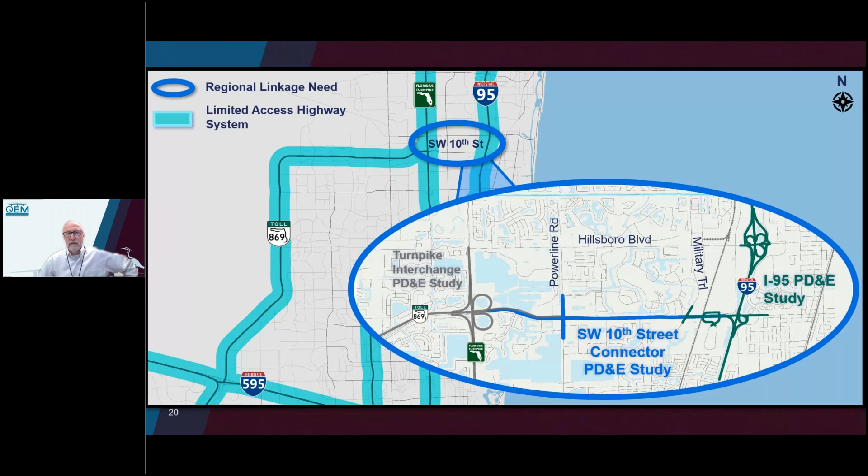So Southwest 10th Street, this is basically a missing link. You see the cyan color there, that's limited access highways with State Road 869 to the left, which is the Sawgrass Expressway, ties into the turnpike. When it was originally planned, it was meant to go all the way to 95. It got shut down by community opposition. And you're going to see in the next slide a number of attempts to try and get that connection made.

Currently it's a local arterial road. And as you can see, there's a strong, heavy movement that wants to go from the east to the west, and a return movement from the west to the east, 51,000 trips a day in that particular direction. So all that traffic is forced into a local road that now has to share the road. And so there's several incidents that have occurred, accidents along that arterial that has a number of signals along the way. It's about a 2-mile stretch between those. Next slide.

So as I mentioned, they had planning of the Sawgrass Expressway back in the 70s. They actually opened in 88. Since then, the DOT tried a couple of studies, one in 93, to put in that missing link, and the MPO voted against it. And then again in 2008, where feasibility was completed, but the MPO would not prioritize the project. So as traffic got worse and worse, the MPO took the initiative with the department to develop a community oversight advisory team. In 2015, they came up with several recommendations that were made in order for the DOT to move forward with a new study in 2017. So if you go to the next slide.

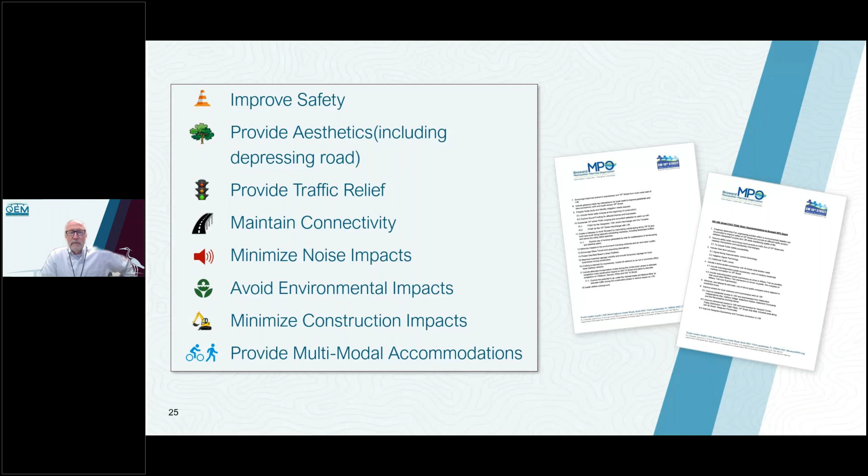Before I jump into that, one of the big points of opposition that came out of the coat was a watercoloring of a depressed roadway. The idea was, okay, we'll let you put in a limited access roadway here, but you've got to put it underground, cover it, or depress it. That was a lot of the expectation of the MPO and the coat as the PD&E moved forward. So as the PD&E got started, we held an alternatives public workshop.

As the team developed the different alternatives, they looked at the depressed section and the amount of impacts that depressing a section would create. It actually introduced a lot of right-of-way impacts. We had to deal with drainage, so we would need some type of pumping system and so forth. We presented a lot of the impacts as well as different alignments: a center, a northern, and a southern alignment.

Through that workshop, there was emphasis to reduce the number of impacts, which actually helped us create more of a range of depressed elements as options, so we wouldn't have to depress as much roadway. We settled in on the northern alignment.

So we did a lot of public outreach and went to alternatives public meeting number 2, and we still got a lot of pushback. So if you hit the animation...

So what we did after the workshop is we sharpened up the pencils and so forth, and we figured out a way to move the profile to the west and still make the connections we needed to the west. So we were able to eliminate that.

With these decisions we made after the workshop and with what we had handled at the waterways, we felt pretty confident we had addressed the concerns and were ready to move forward.

So in October of 2019, the city and the MPO started raising concerns, so we decided to postpone the public hearing. So we had to regroup.

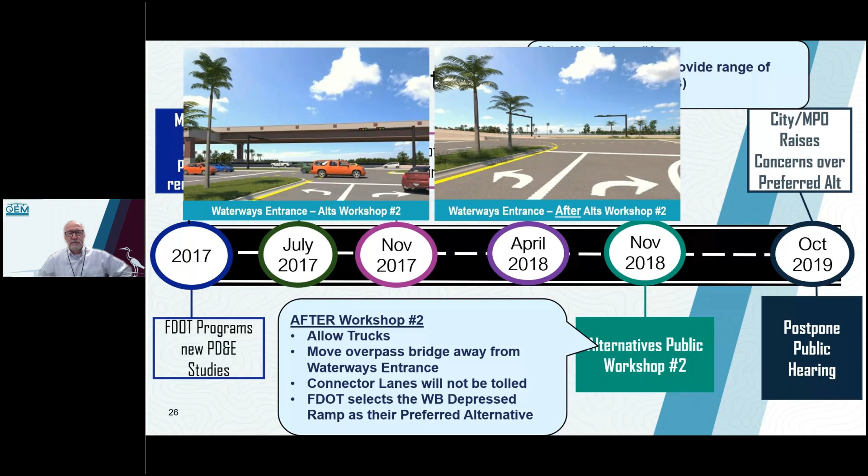What do we do? We decided we really needed to understand the concerns. We thought we knew the concerns, we thought we had made some very good decisions to address them, but it wasn't enough. So we had multiple meetings with the city of Deerfield Beach, who was the primary vocal entity that was really fighting for what they believed in for the project.

And we sat down with them a number of times to make sure we understood the challenges. As we went through this, we got into more detail where now they were concerned, and they had brought this up before, but we didn't gauge the magnitude of it, that they wanted the express lanes or the new connector lane on 10th Street to connect to the general purpose lanes and not just the express lanes. A lot of that has to deal with trucks would have to shift over and use the local lanes, and they just wanted to get more traffic off the local roads.

They also went back to what was really one of the comments about multimodal. So they wanted more of a complete street element in the project, and they were concerned that there wasn't enough depressed sections in the project, and they wanted more green space as well. They felt that if we depress sections, we'd get automatic green space, but as we worked through the impacts and who would maintain things and what exactly you would put on a depressed section, it wasn't going to be a lot of green space or park area like you've seen in some of these other areas.

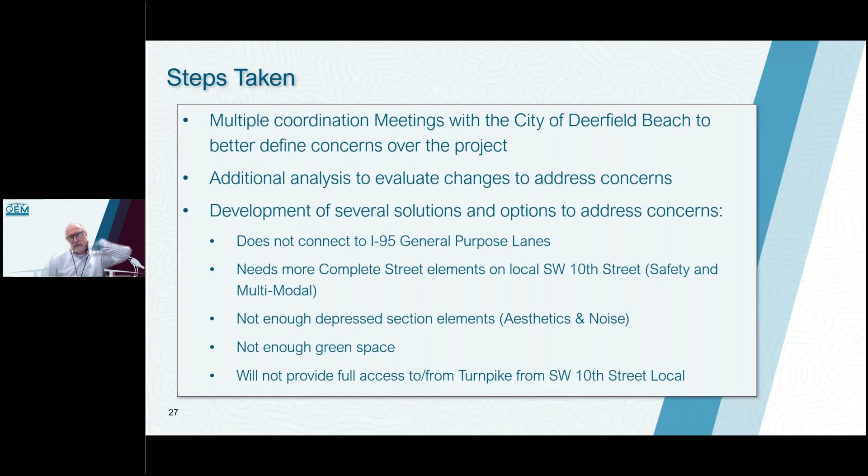So for the connection to 95, the district had made the decision that we will make that connection. We did a layout. We showed we could fit everything within the right of way of the interchange and still make that connection. We did cost estimates, and the department made the decision to move forward with those additional connections.

We showed how it would work traffic-wise, the benefits we received, and they made that decision. The complete street elements, we were able to incorporate a shared use path throughout the limits of both projects. So that was a huge benefit to be able to fit a 12-foot path throughout the limits.

As far as the not enough depressed section for the roadway, if you click on that, we can't necessarily say we checked the box, but we did explain all the challenges and the impacts, because that actually introduced more right-of-way impacts, construction challenges, utility relocations, business relocations as part of that. So we really went into depth about why those impacts really meant you weren't getting the benefits they thought from a depressed element.

And then from a not enough green space perspective, we actually created another option, which actually reduced all depressed elements on the project. But by doing so, it gave us more space that we could give back to the community, some nice buffer area and green space, and really allow for somewhat of a meandering shared use path through that area.

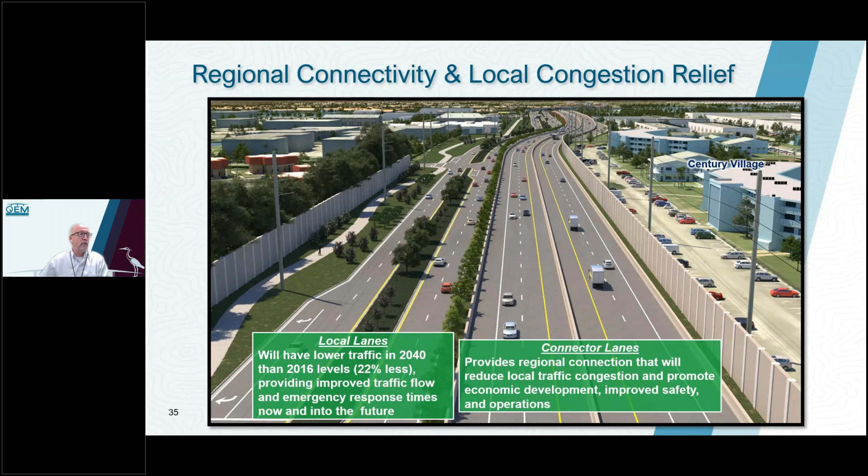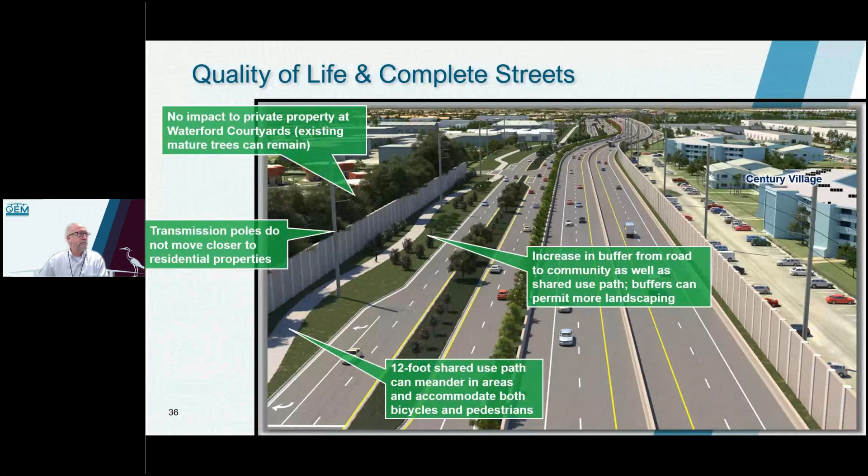So in closing thoughts, again, set goals. What do you want to get accomplished with your virtual meetings? And plan. Challenge each other on doing things better and making sure everybody understands their roles and responsibilities, and have redundancies. You know, if somebody's sick, somebody's computer's not working, how are you going to deal with that? Develop a way to communicate behind the scenes so that you can handle those things that'll happen, because nothing goes smooth.

Even though you want to have an interactive meeting, you do need to have control over the audience. So you want to make sure that they understand that and where they'll have opportunities to talk, so that they don't get impatient. And when they do ask a question or a chat, respond to them right away. Tell them you got it. Stand by, we'll be answering it shortly. If not, please let us know. Understand how to use all those different features on it, and think ahead.

Maximize the time that you have, and also be prepared if you have extra time at the end. If you've set an end time, how you want to deal with it if they're not participating, how you want to fill in that time, or at least provide some beneficial information.

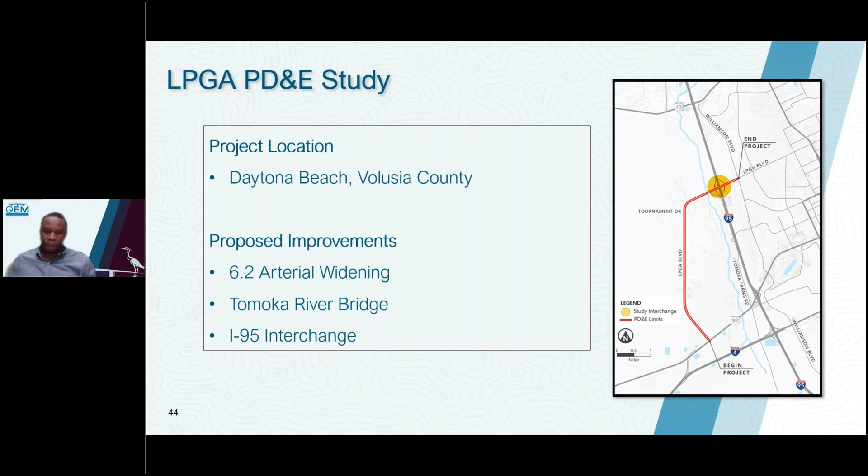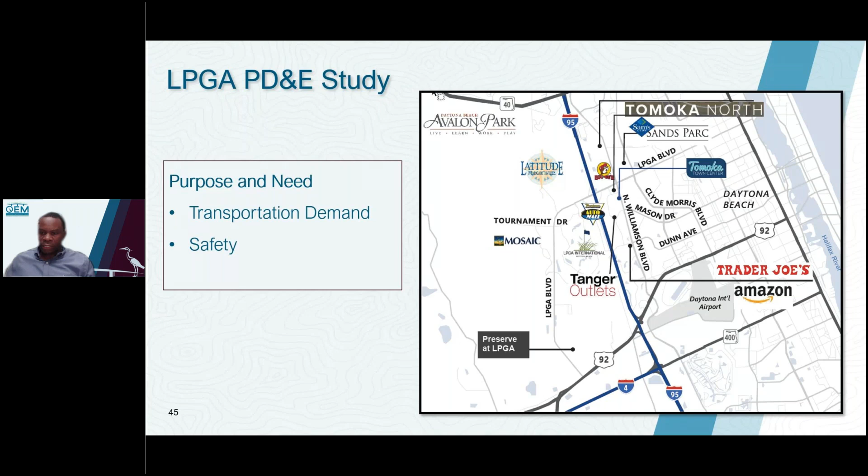The area has experienced unprecedented growth in recent years, transforming from a rural area in the 1980s into a hub of multiple major developments, as highlighted on this slide. Many more are being planned and are coming. Transportation demand has increased and congestion has grown significantly over the years and is expected to get worse in the future. Additionally, the corridor has severe safety issues which arise from congestion. Given these needs, the project is well needed by the residents and businesses alike in the project area.

So the community came together to solve the problem. In response to the community call, a coalition was formed between the Florida Department of Transportation, River to Sea Transportation Planning Organization, City of Daytona Beach, and Volusia County. All parties contributed financially to advance this project.

One unique aspect of this project is it was born in the community. FDOT programmed the PD&E study and design phases, and is diligently working on identifying construction funds. Our strong relationship and active engagement with local leadership has enabled us to develop mutually agreed upon solutions that everyone can support. Local leaders are also assisting us in effectively communicating the right messages to their constituents.

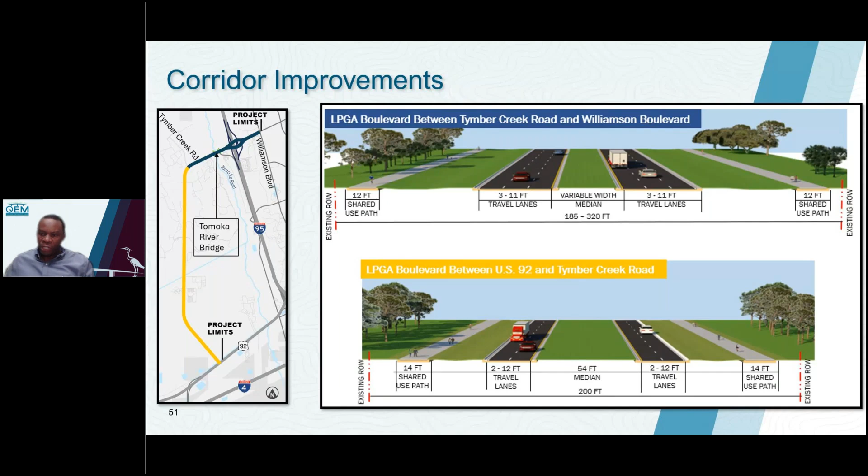Near Tomoka River Bridge, the right-of-way is narrower. However, all bridge improvements are optimized to be within the existing right-of-way.

Here's a picture view of the existing Tomoka River Bridge, which will be replaced with a new 340-foot bridge. The new bridge will match the 6-lane section that I described previously, and also to enhance wildlife connectivity, 2 wildlife shelves are proposed beneath the bridge.

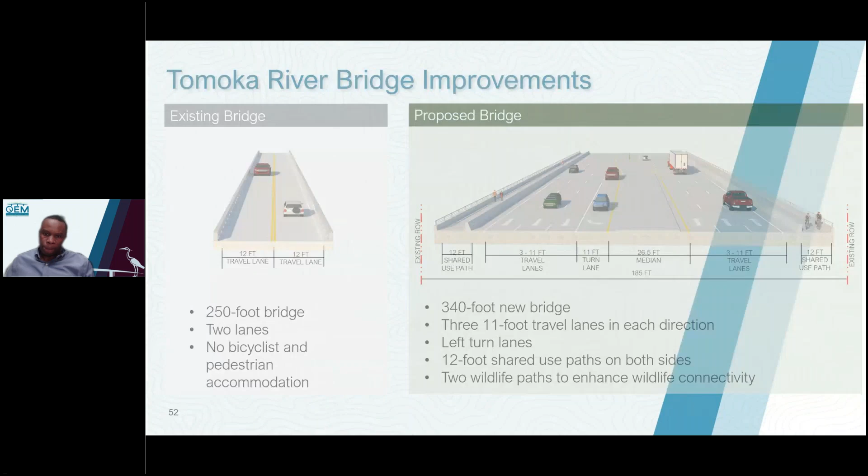In terms of intersection improvement, we use the intersection control evaluation (ICE) process to evaluate several intersection concepts that would improve safety and reduce congestion. In addition to traditional signalized intersections, we analyzed modern roundabouts, restricted crossing U-turns (R-CUT), through cuts, and median U-turns, which are more effective and safe.

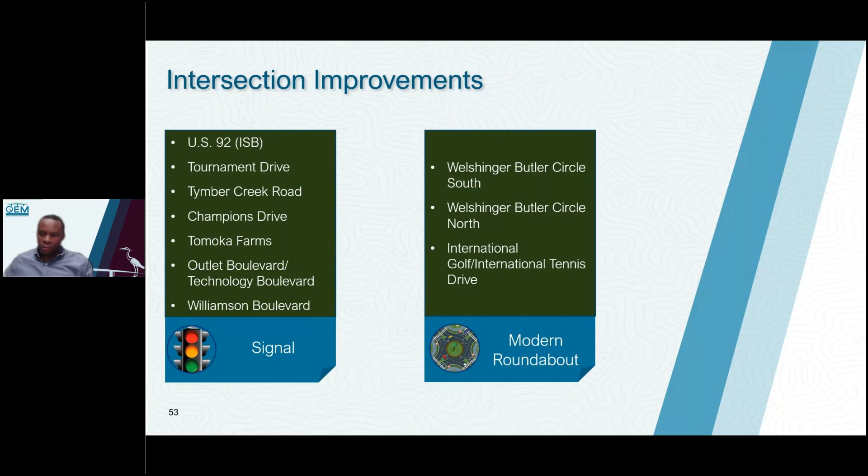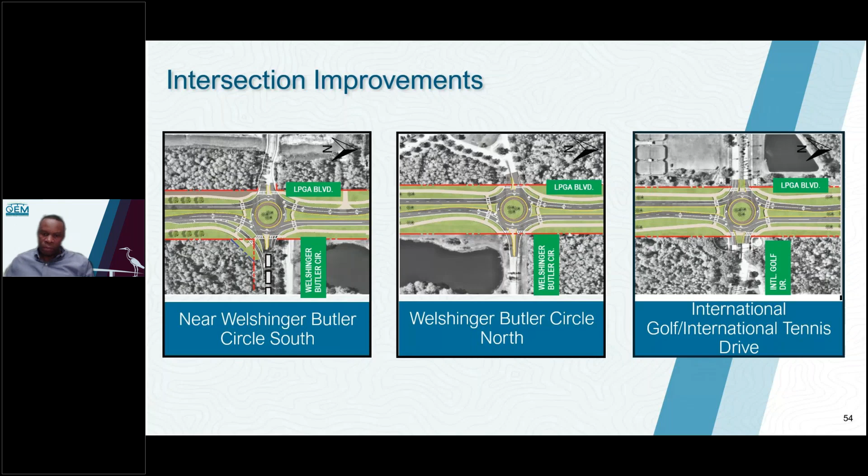This slide shows the modern roundabout, which we warranted over a traditional signal at the following intersections: Welshinger Butler Circle South and North, and International Golf Parkway at International Tennis Drive. Unlike traffic circles, modern roundabouts are specifically designed to prioritize safety and traffic flow efficiency. They operate on a yield system, which eliminates the need for a full stop and ensures a smoother, more efficient flow of traffic.

Given that roundabouts are new in the area and in Volusia County in general, our post-public open house engagement effort focused on educating residents about the difference between modern roundabouts and traditional traffic circles. Some residents in this area are retirees from the Northeast, where roundabouts are being replaced with traffic signals, and this was one of the concerns they brought to us. We clarified that those are actual traffic circles, and we highlighted the safety and operational benefits of the modern roundabouts we are proposing in comparison.

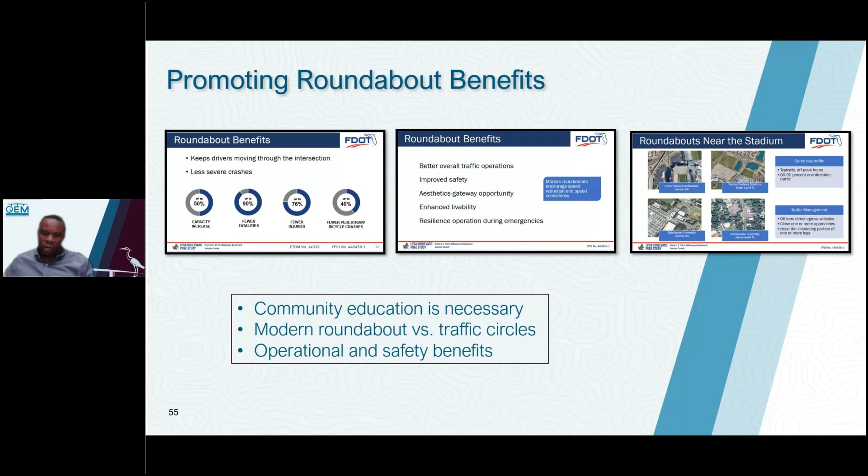Traditional signal control is proposed at Tomoka Farms Road, Outlet Boulevard and Technology Boulevard, and the Williamson Boulevard intersection. During the public open house, we introduced innovative concepts designed to redirect certain movements at the intersection.

A restricted crossing U-turn was initially proposed at the Tomoka Farms Road intersection, and a through cut, which prohibits through movement at the intersection, was proposed at the Technology Boulevard and Outlet Boulevard intersection. After more in-depth evaluation and careful consideration of community feedback, District 5 decided to retain this intersection as a traditional signal, accommodating all movements.

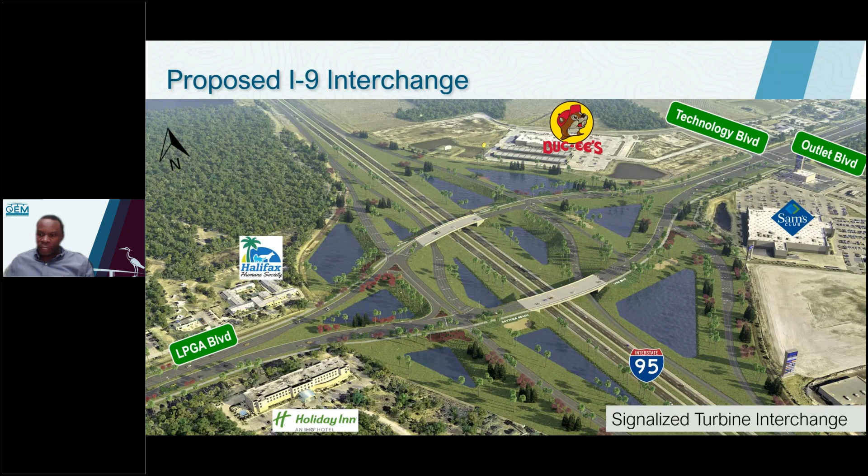In terms of the interchange, the proposed I-95 interchange is an innovative concept called a signalized turbine interchange. It borrows characteristics from a freeway-to-freeway interchange and a split diamond interchange. The on-ramp and left turn lanes are separated to improve capacity of the ramp terminal intersection. Also, the off-ramp left turns are tucked under the side of the bridges, and they intersect LPGA with two-phase signals.

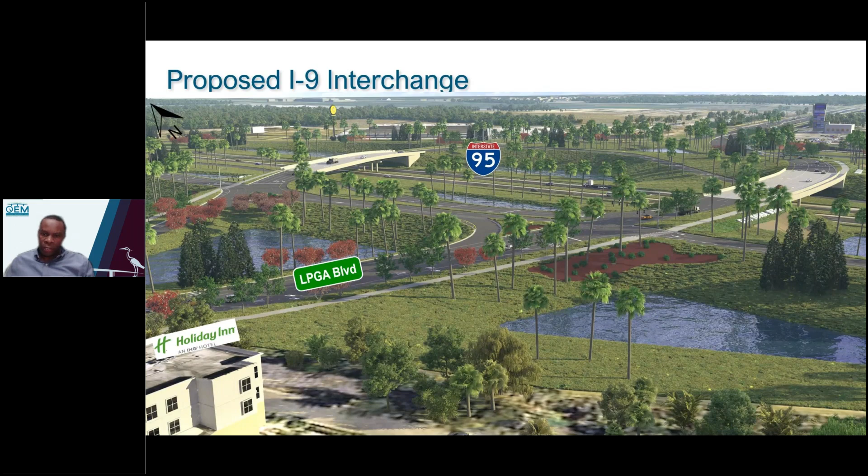This slide shows a close-up view of the interchange rendered image, with the camera located above the Holiday Inn, at your left bottom corner of the slide. The bridges are separated to provide longer queue storage for turning vehicles without interfering with oncoming traffic. At the interchange, LPGA will operate as one-way pairs. This is how we will realize increased capacity. Another benefit of this interchange is the reduction of the number of conflict points where the ramps intersect LPGA Boulevard, to enhance safety.

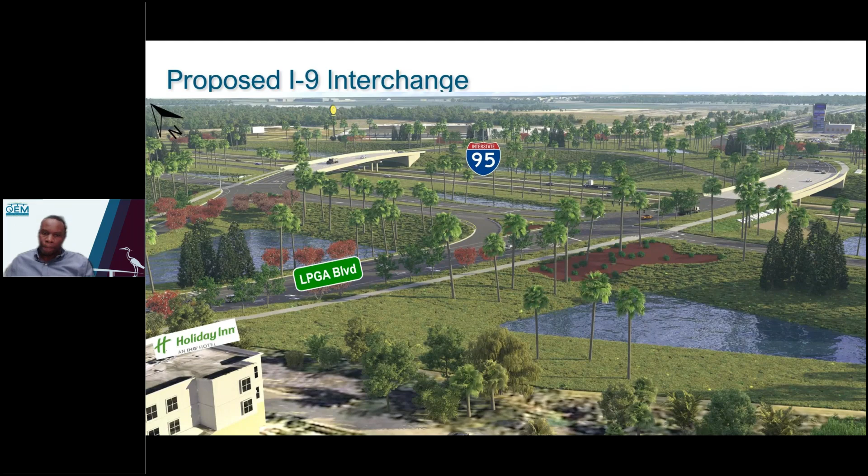Another view showing the southbound on-ramp of the interchange.

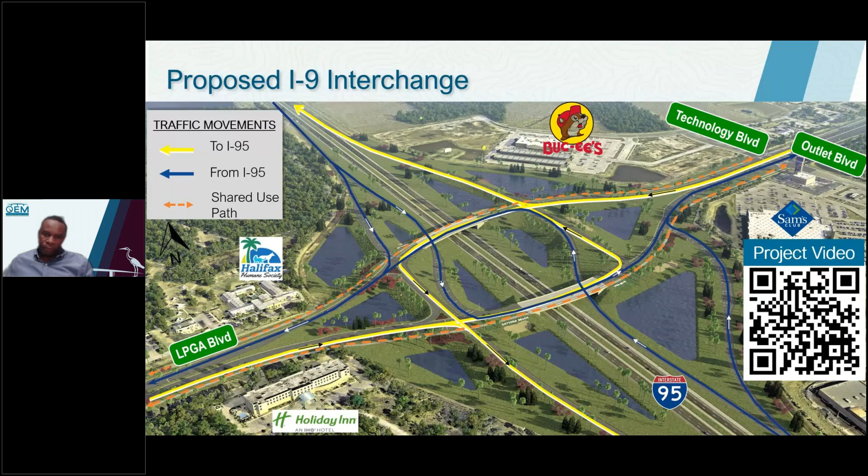To close, this PD&E study received location and design concept acceptance in February this year. You can follow the link shown there if you have any questions. I'd like to take this time to thank District 5 for entrusting HDR with this PD&E study, and our sub-consultants who helped us deliver this project, more specifically Giabi Consulting and Management for leading engagement efforts. Thank you for your time.

It takes a team, doesn't it, Victor? Thank you so much. We do have a question for you from Kimberly, so we got your question and we'll forward it on to Victor. So we're going to keep moving.

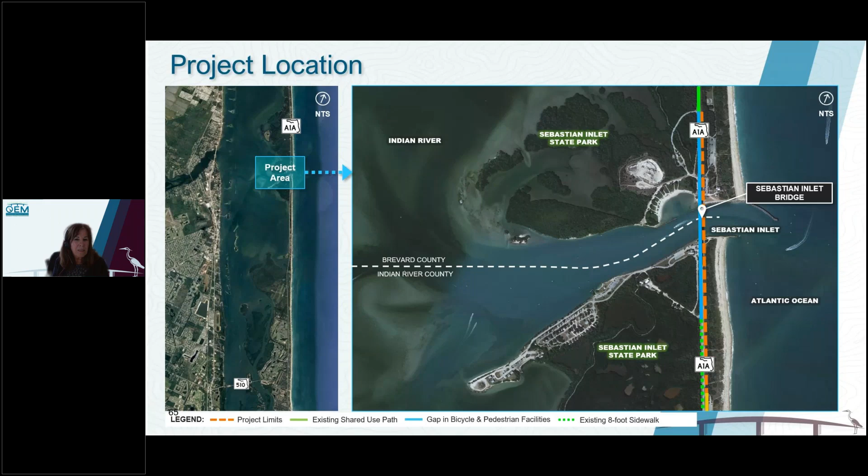The Sebastian Inlet Bridge was constructed in 1964 and has been retrofitted a couple of times. The existing bridge vertical clearance is 39 feet, and the horizontal clearance between the bridge fenders is 150 feet. The bridge typical section is 2 lanes, one in each direction, with 2-foot shoulders and no bicycle or pedestrian facilities. The bridge is also eligible for the National Register of Historic Places under Criterion C for engineering, and it's part of the Indian River Lagoon National Scenic Byway for State Road A1A. I also want to note in this image, you can see under the bridge there are fishing or observation piers, one located on each side, extending from the park area to the bridge fenders. Next slide.

The purpose of this project was to address the bridge's structural and functional deficiencies and address the gap in system linkage for bicyclists and pedestrians. The need was that the bridge, under the National Bridge Inventory rating system, was rated structurally deficient and had a low health index and sufficiency rating. That doesn't mean the bridge is unsafe to travel across, it just indicates the need for replacement. It supports the Indian River County Bicycle and Pedestrian Plan for State Road A1A at this location to address the gap in bike-ped facilities. During the project we did a bicycle and pedestrian count along with traffic, to assess how many people use the bridge. Over a 4-day period, we had 231 bicyclists cross the bridge—they crossed in the travel lane—and 5 pedestrians. Next slide.

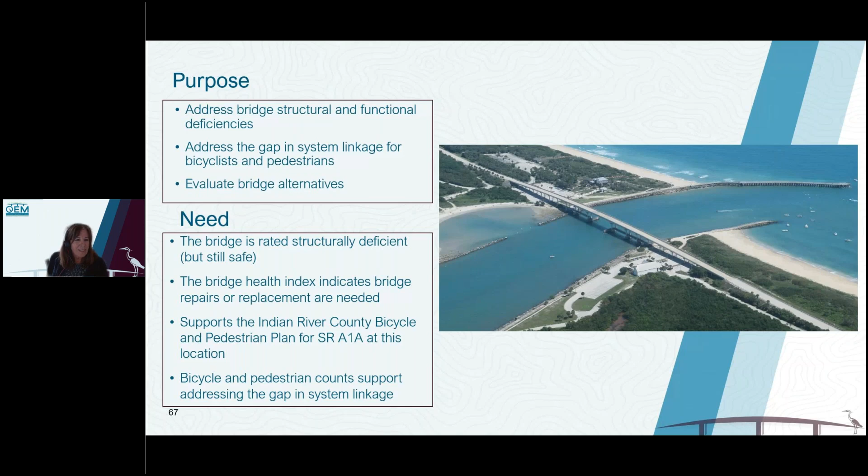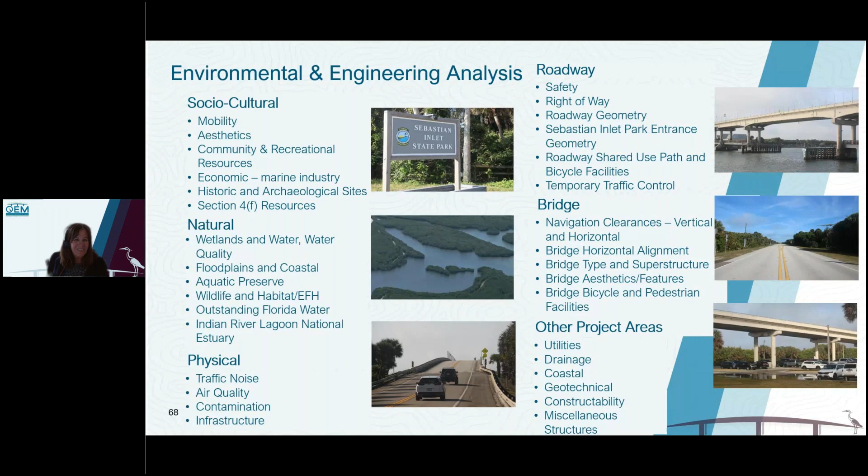Unique to this project is that the land under the Sebastian Inlet is actually owned by the Sebastian Inlet District, and they were founded in 1919. They're a taxing district that was put in place to maintain the Sebastian Inlet and keep it open, along with some other features and amenities that it does have.

I also just want to note that the Sebastian Inlet is not part of the Intracoastal Waterway. The Intracoastal Waterway is to the west in the Indian River Lagoon, about 2 miles to the west. But the Sebastian Inlet District, in the recent past, has dredged a channel through a U.S. Army Corps of Engineers permit to the Intracoastal Waterway in order to help maintain that navigation connection between the Atlantic Ocean and the Indian River Lagoon and the Intracoastal Waterway.

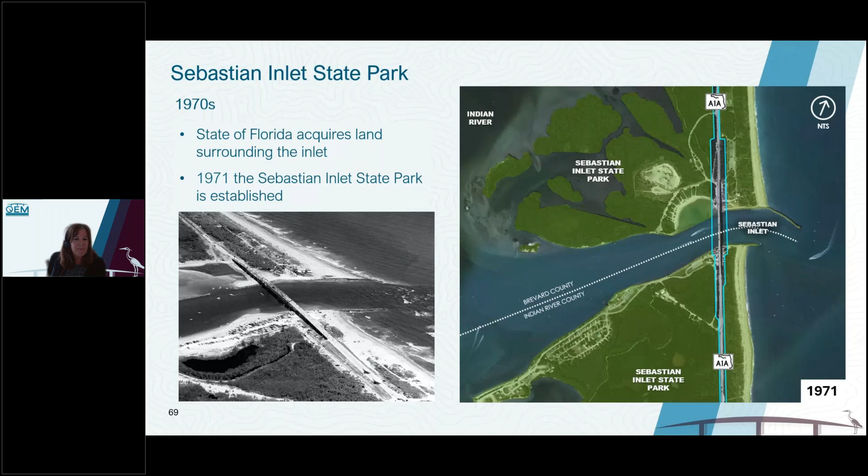So as you can imagine, just based on where this project is located, there was a lot of agency coordination at the federal level, at the state level, and the local level as well. The U.S. Coast Guard, because a bridge permit is involved, is a cooperating agency for this project.

So very early in the PD&E study, we kicked off coordination with the Coast Guard because we had to be able to determine what that preliminary determination of vertical clearance would be, if we would be maintaining the existing 39 feet or if there was a need to increase the vertical clearance. And as I had mentioned, the Sebastian Inlet is not on the Intracoastal Waterway, which the guide clearance for bridge crossings, the Intracoastal, is 65 feet vertical clearance. So this was a little unique because it's a fixed bridge.

There's no bridge tenders, so we didn't have any tender logs that let us know what kind of vessels were passing through the inlet, what the sizes were. So we, in coordination with the Coast Guard and their scope of work that they gave us, developed a strategy to do a navigation survey. And that was an online survey, and I'll get to that in a few minutes. But we used that information that was gathered along with the unique characteristics of the Sebastian Inlet. It has unique bathymetry, it has a skew angle, it is pretty aggressive in its current that passes through the channel. So there were a lot of factors to consider for this vertical clearance in this navigation needs memo.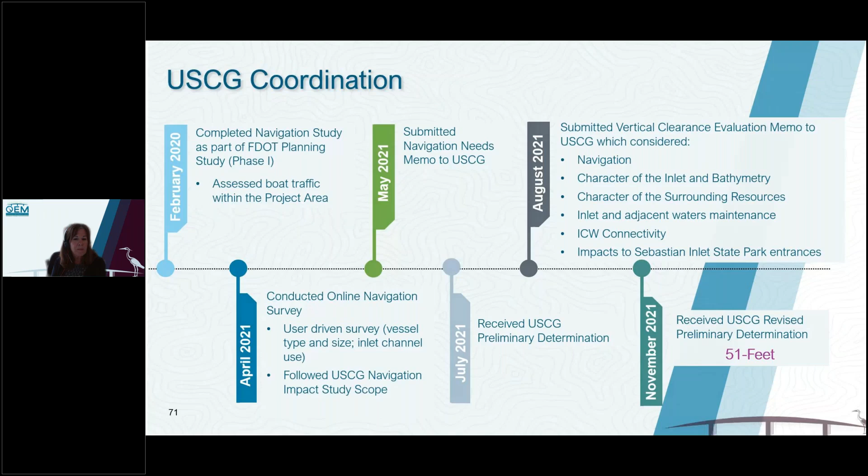So at the time we began this online navigation survey, I just want to note that there was also a new chapter that was added to the PD&E manual for U.S. Coast Guard coordination. So this was one of the efforts that came out of not only that new chapter, but this unique scope, because the project location was so remote. There were not a lot of residents in the area. So our outreach area for the navigation survey included a mailing of 973 postcards to residents and marinas and users up to the Melbourne Causeway, across to US 1, and down to the Wabasso Bridge area.

We also notified it on the project website. It was posted on the Sebastian Inlet District, MPO, Town of Orchid websites, as well as FDOT social media. And then it was advertised in the U.S. Coast Guard local notice to mariners. So the outreach was pretty significant. And we ended up getting 260 responses and 57 comments from that online navigation survey, which we utilized to support the navigation needs memo.

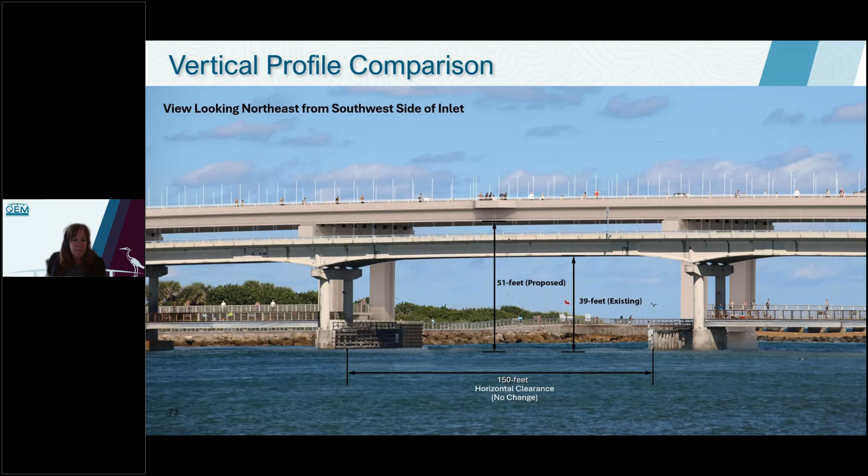So this is just a rendering showing the existing 39 feet vertical clearance for the bridge and the proposed new bridge at 51 feet vertical clearance, maintaining that 150 feet of horizontal clearance. And this is looking to the east, northeast towards the Atlantic Ocean.

And this is just a clean rendering showing the proposed new bridge from the PD&E study. And then you can also see that the underbridge observation fishing piers are also proposed to be installed.

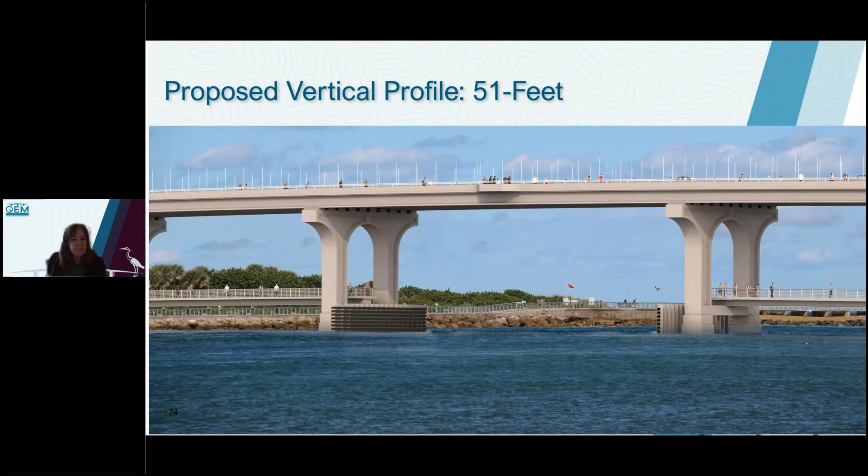So early from the project kickoff meeting, one of the primary concerns of stakeholders was whether the bridge would remain open during construction, because this is a critical coastal route. Not only residents use it, but tourists, park visitors, emergency services, and bicyclists and pedestrians.

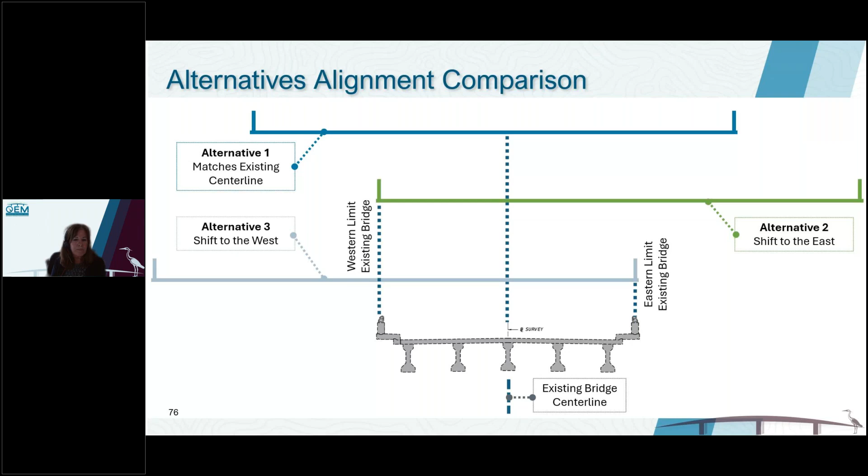This all tied into the preferred alternative construction phasing. The way it was developed, the existing bridge would remain in place and open to traffic while the eastern half of the new bridge, farthest away from the existing bridge, would be constructed first. Once that phase was completed, traffic would shift to the east half of the new bridge, the existing bridge would be demolished, and then the west half of the new bridge would be constructed.

Then in phase 3, whatever needed to be completed to finalize the construction of the new bridge would be completed, and traffic would resume normal patterns with the 2 lanes and the shared use path.

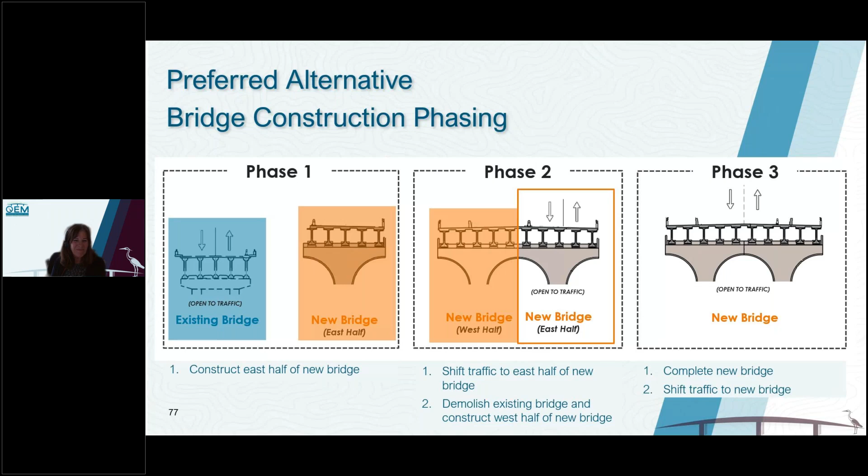This is a rendering looking northwest from the south side of the Sebastian Inlet. It shows the 2 lanes, one in each direction, for the typical section, with 10-foot shoulders, which meet design standards and remove that functional deficiency. Those shoulders, although not typical, were marked for bicycle lanes as well, and there's a shared use path 12 feet wide on both sides of the bridge. You can also see little bump outs, 3 on each side of the bridge, put in place to allow people to take a break, take in the views, and enjoy this unique and beautiful project location.

You can also see the underbridge observation piers are in place. The poles you see sticking up were installed on the existing bridge back in the 1980s, in coordination with the Fish and Wildlife Service and the Florida Fish and Wildlife Conservation Commission, because bird strikes were an issue with birds flying over the bridge and striking vehicles. Those poles actually help the birds fly up and over the bridge and avoid those bird strikes.

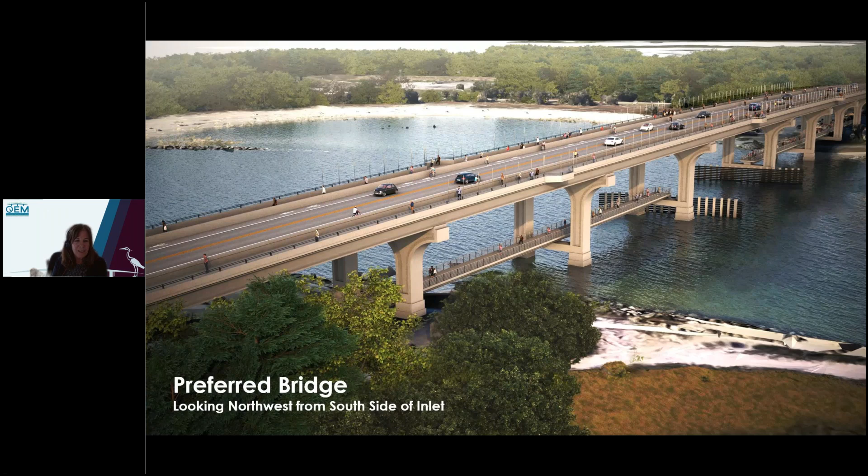This is a rendering looking from the south side of the inlet, again northwest. You can see the South Park entrance. Although traffic didn't warrant any improvements to capacity or lanes, in coordination with the district and the Sebastian Inlet State Park, there was talk about improving safety entering and exiting the park.

So a right turn lane was proposed at the South Park entrance exiting the park, allowing vehicles towing boats and trailers, RVs, that use this area heavily to exit safely. There's also an acceleration lane provided in the southbound direction to allow them to move into the travel lane safely. Next slide.

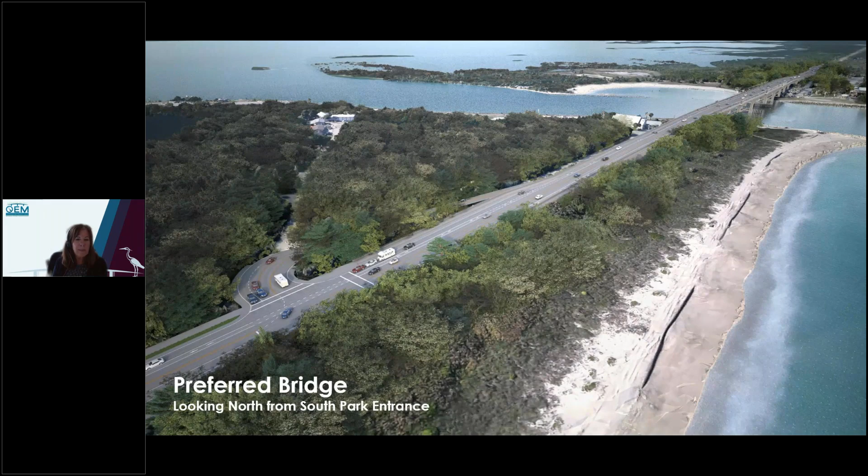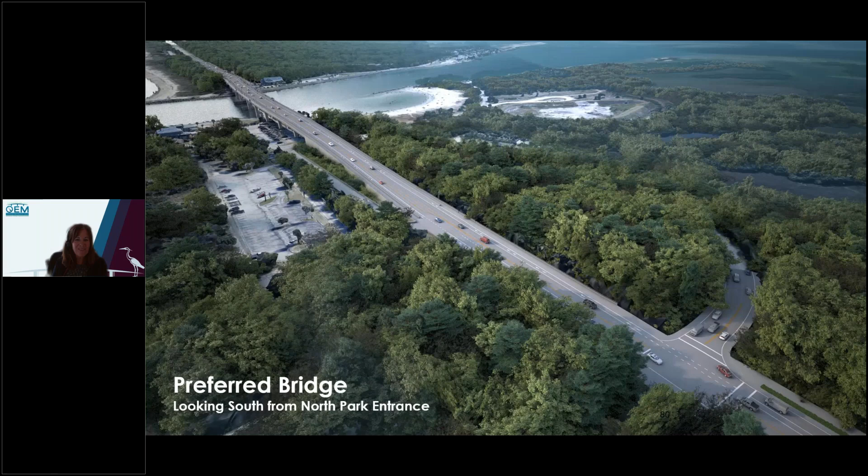Very unique. All right, and we are packing in a ton of information, as y'all can see today. So, oh yay, thank you. Thank you for your reactions.

In order to keep us going, we're going to skip right through to the next presentation. But in order to shift gears, we'll do a really quick poll question. Sierra, this one's concerning our next topic, process efficiency. How much of your PD&E work is with FDOT versus other entities? Of course, this will play into what their processes are.

All right, we'll just give it a minute. 100% is leading the pack. We love that, everybody loves FDOT. All right, go ahead and close it, Sierra. 100% led the pack for that one.

I'll hand it over to JJ Jacquin from AIM Engineering to talk about process efficiency with US 98. Thanks, Siobhan, and thank you for the opportunity to talk to you today about how we on the consultant side partnered with FDOT to fast track the concurrent PD&E and initial design efforts for this US 98 widening project. I served as the consultant project manager, and David Turley with FDOT District 1 Office, Environmental Management Office, served as the FDOT in-house project manager.

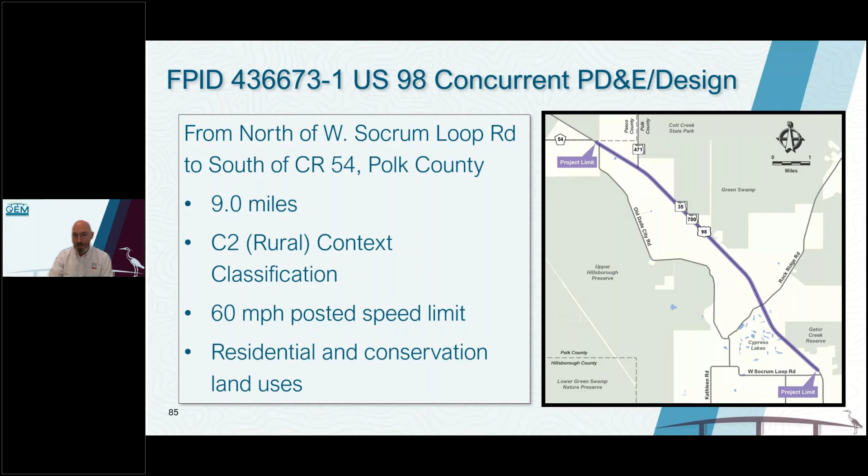Next slide. So this project was looking at this portion of US 98 in northern Polk County from north of West Socrum Loop Road to south of County Road 54, about 9 miles long. It was a rural corridor, 60 mile per hour posted speed limit, with residential and conservation land uses throughout.

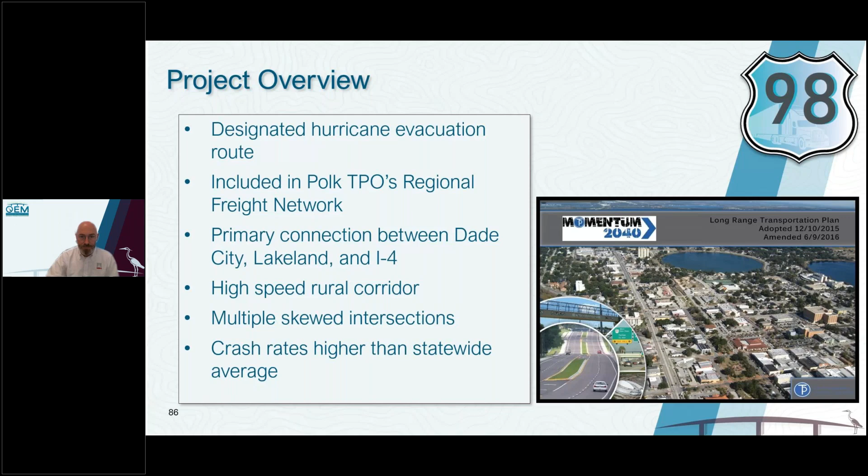Next slide. The purpose and need for the project was to widen the existing undivided 2-lane facility to 4 lanes so that we could improve transportation network connectivity while eliminating the 2-lane bottleneck, increasing corridor capacity, and improving operational and safety conditions throughout the corridor.

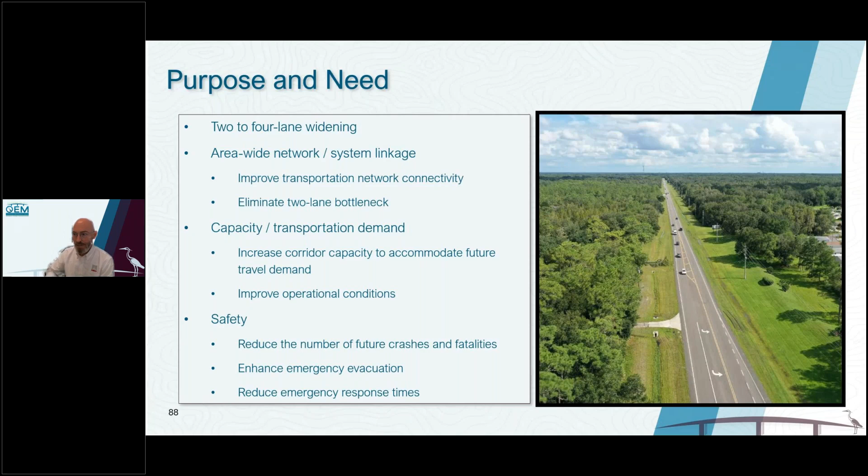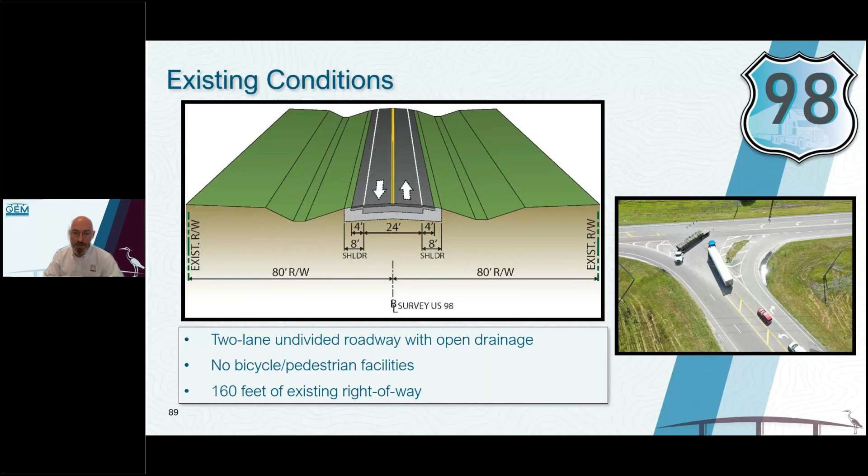Next slide. The existing facility is a 2-lane undivided roadway with open drainage. There were no bicycle or pedestrian facilities within the corridor, and we had 160 feet of existing right-of-way. You can see we had major overhead utilities running along both sides of the facility through much of the corridor. Next slide.

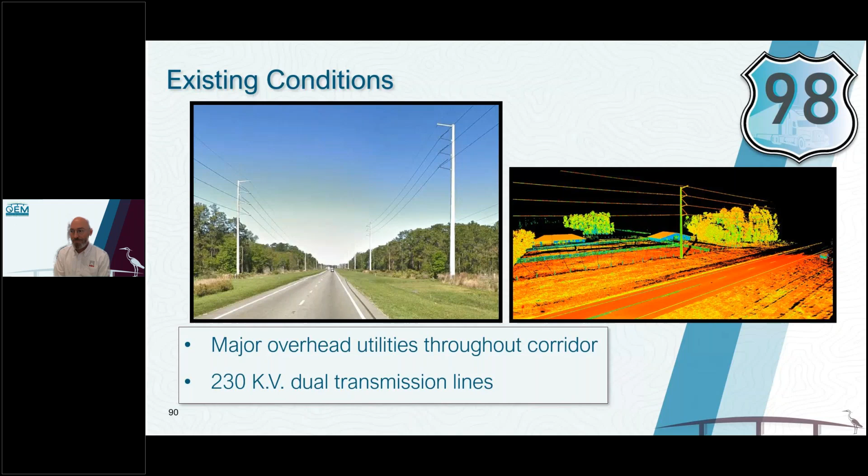Our project scope and goals were to address the project needs and to conduct a PD&E study, prepare 45% design plans, and to assist the department with the design-build RFP development and the alternative technical concept evaluation processes, while helping the department meet a funding timeline constraint imposed by the ARPA funding that all construction funds needed to be expended by December 31st of 2026.

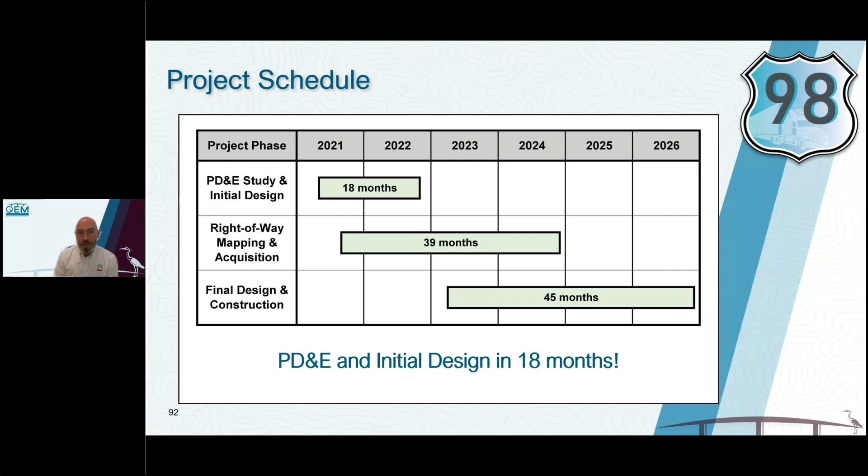So we kind of zoomed out, put together a bar schedule that you see here, and realized that our portion of this project needed to be completed within 18 months - that's the PD&E study and initial design. Next slide. A schedule like that could only be accomplished through the combined commitment of the consultant team and our department partners. So we quickly identified project champions that could help steward this project through the department review and approval process, helping us to achieve that schedule.

So in the first area, contract execution, on the next slide I'll go through a little bit of the project. It was awarded to us in November of 2020. Based on the volume of contracts that District 1 procurement was processing at that time, we were not expecting notice to proceed until March of 2021. But in order to maintain schedule, we needed to get out there to get our crested caracara and sand skink surveys conducted in January of 2021. So the clock was ticking. Next slide.

So we partnered with our FDOT colleagues to determine how we could advance the seasonal species surveys as well as engineering topographic surveys, geotechnical field work, and preliminary traffic analysis under multiple existing GEC and district-wide contracts. Also to help facilitate the rapid execution of the contract, we pulled out just the critical initial project management, public involvement, PD&E, and design activities, negotiated and executed those, and then executed the remaining services after the initial execution through a series of optional services amendments.

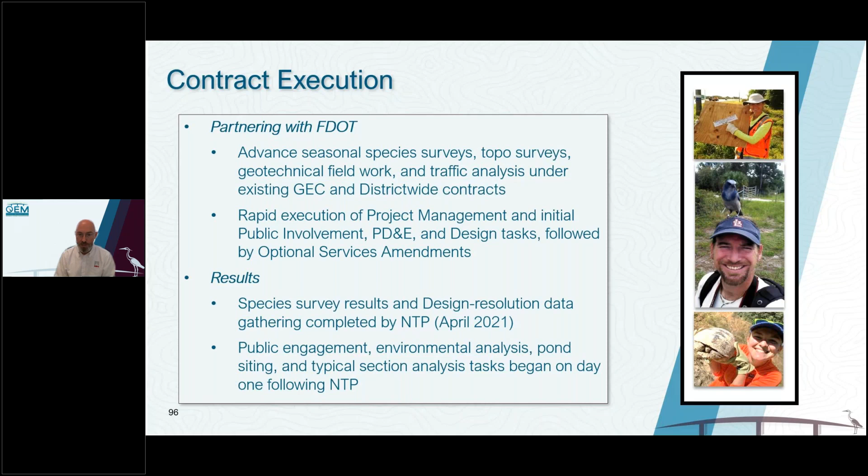Moving into the project management area, this project timeline was compressed. That calls for more project management, not less. So to facilitate that effort, we designated a separate design lead to help me manage the parallel design tasks that needed to take place. And we got together with our FDOT project managers and determined that weekly progress meetings would be necessary for us to keep this project moving. And we required an attendance commitment from key department and consultant staff so that in those weekly progress meetings, we could have meaningful brainstorming sessions. We could make decisions in the meetings. And that resulted in really meaningful coordination completed every single week of that project, not in between the monthly progress meetings, but during the weekly progress meetings.

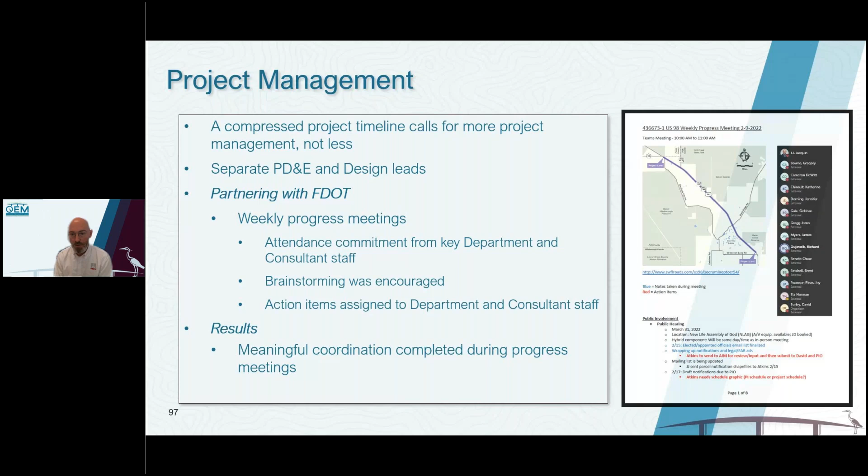In stakeholder engagement, we had a number of stakeholders with interest in the widening of this facility, including the many approval and review agencies, the affected communities. We had interested NGOs, including the Sierra Club, and then other transportation departments at the city, the county, and FDOT District 7. And we knew that because this project was funded through construction, that the engagement that we began in the PD&E phase would meaningfully continue all the way through completion.

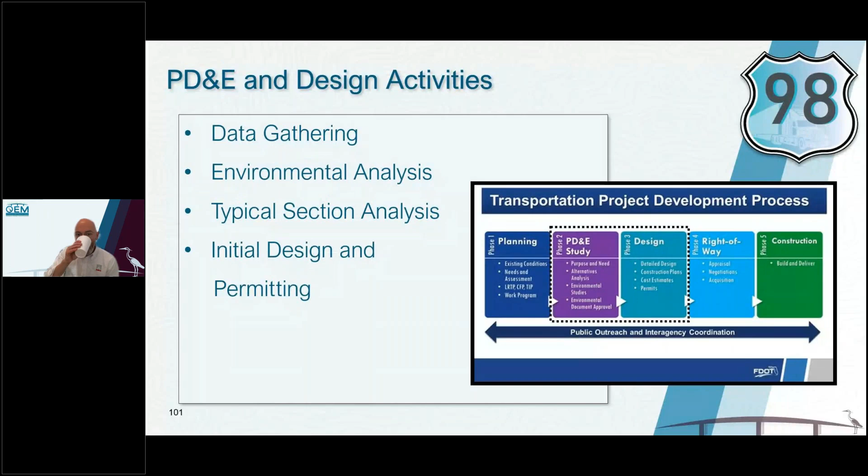Under PD&E and design, I've broken this out into 4 subcategories. I'll go through each of those. The first one here is data gathering. We got with FDOT early so that we could understand and come to an agreement about the type and resolution of the information that we needed. And that included the design level topographic survey and geotechnical subsoil analysis early on in the project. And we advanced those critical data gathering activities through those existing district contracts. That allowed us to have high resolution design data on hand when we needed it, so that we could make design decisions very quickly. We didn't have to slow down or pause the project to go back out into the field to collect the information needed to make those decisions.

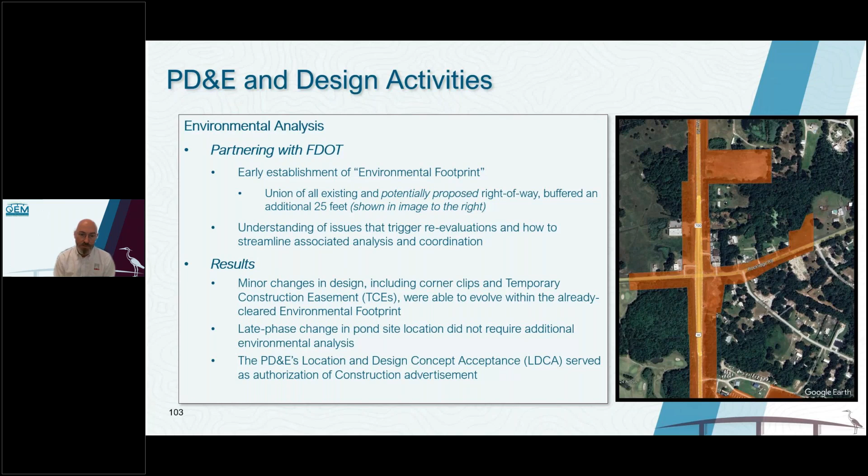Under the environmental analysis component of the project, we very early on established the environmental footprint for this project that was the union of all of the existing and potentially proposed right-of-way for the project. So we did have a number of pond site alternatives that we included in that environmental footprint, and we buffered that footprint an additional 25 feet. We used our understanding of the issues that trigger reevaluations and determined how best to streamline those reevaluations should any be required. And the results are that the minor changes that occurred in the design, including corner clips and TCEs, were able to evolve within that environmental footprint that we'd already cleared. We did have a late phase change in a pond site location, but that did not require any additional environmental analysis.

And I'm happy to say that the PD&E study's LDCA served as the construction advertisement authorization for the project, and no reevaluation was needed. For typical section analysis, we needed to determine the appropriate context classifications, target and design speeds. We needed to evaluate the bike and pedestrian needs, and we needed to do a lot of very quick and rigorous typical section and alignment analysis to keep the project moving along.

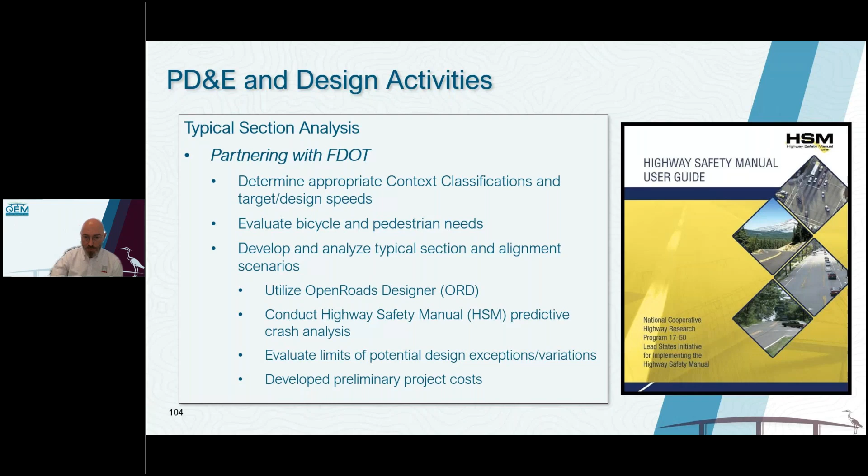So we used ORD and worked with the district design engineer to conduct a series of Highway Safety Manual predictive crash analyses and evaluated the potential for exceptions or variations along the corridor. Through this analysis, we were also able to develop very high resolution project cost estimates.

The results are that we revised the context classification in the southern segment from a C2 down to a C3R suburban residential. We reduced posted speed limits throughout the corridor from 60 miles per hour to 45 and 55 miles per hour. We provided 10-foot shared use paths in the southern segment of the corridor, and we worked with the district design engineer and their staff to quickly evaluate and approve proposed typical sections that did not require mainline right-of-way, helping us maintain that engineering analysis schedule.

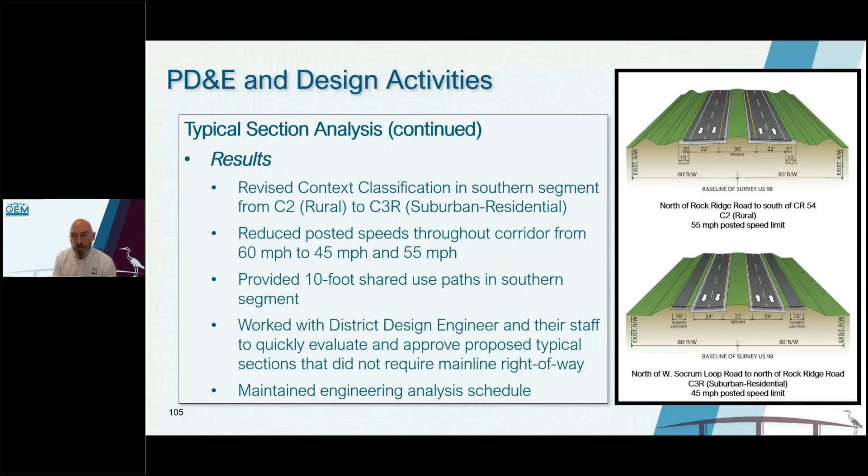Under the initial design, which we took to 45% plans and permitting effort, we partnered with FDOT to help us move quickly through the roundabout performance and geometric analysis efforts with both the district and central office staff. We included FDOT reviewers in pre-phase review meetings so that they could understand what was going to come across their desk for review before they received it cold in an ERC assignment.

We partnered with district construction, bringing them into our weekly progress meetings, and had additional outside coordination with them to confirm the constructability of our proposed improvements within the existing mainline right-of-way. Through all of that coordination, we were able to reduce the FDOT review effort considerably, and we developed design plans that supported the RFP development process, with all permits received prior to construction.

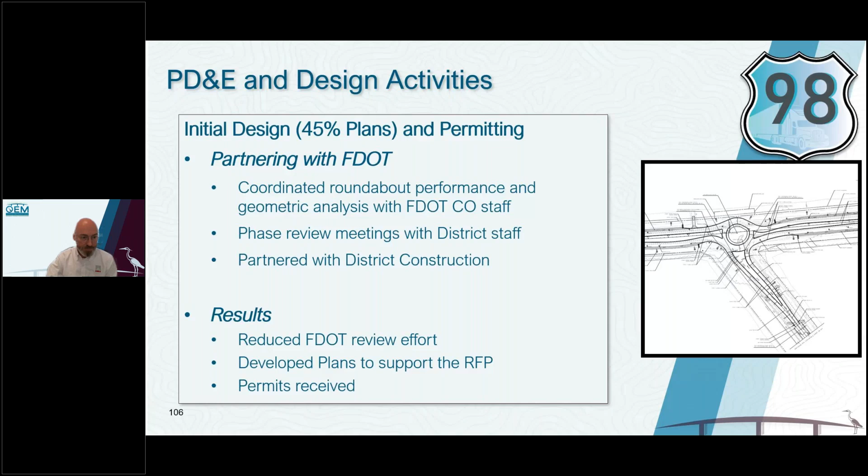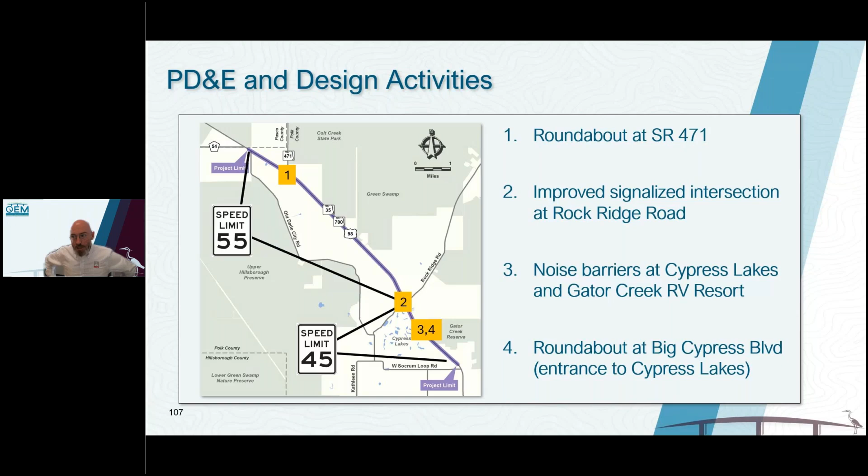Moving into the right-of-way identification and acquisition portion of the process, we did not need mainline right-of-way, but we did need a number of parcels for off-site drainage facilities. We all know that the acquisition duration of those parcels had the potential to affect that design build construction schedule, so we partnered with FDOT to bring the right-of-way staff into our weekly progress meetings so that we could better understand the right-of-way acquisition process and allow those folks to help inform our design decisions as we progressed.

Department right-of-way legal and GEM staff got together and determined that they could advance right-of-way acquisition for this project. So we added a title search consultant to our project team. As District 1 conducts what they call 210 meetings as they begin to review parcels identified for acquisition, in advance of the 210 we have a pre-210 meeting to go parcel by parcel with the right-of-way staff so that we could all understand what those issues are.

We worked with right-of-way to help prioritize the acquisition of those parcels so that we could support the safe and logical construction of the project. Through all of that partnership with District Right-of-Way, we were able to realize a lot of efficiencies in that coordination and the subsequent review and acquisition process.

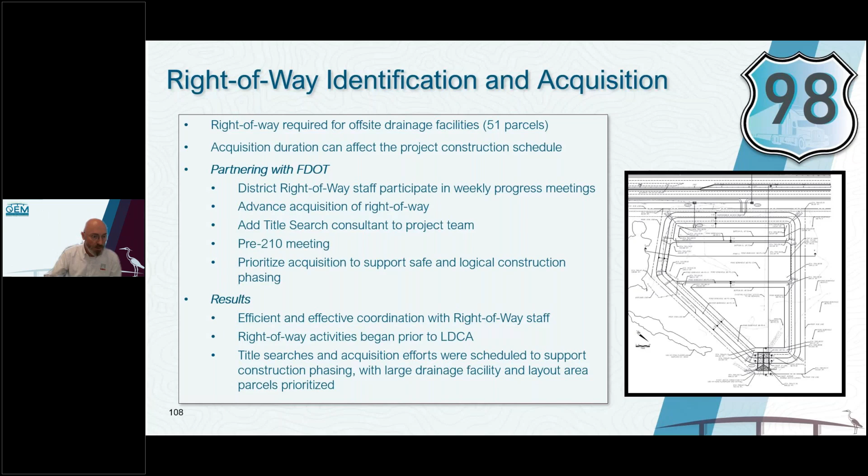The right-of-way activities began prior to LDCA through advanced acquisition, and the title search and acquisition efforts were scheduled to support the construction phasing, with large drainage facilities and layout areas prioritized for acquisition.

The department brought on a consultant to assist with the development of the design build RFP, and the RFP was developed to encourage innovation in the design build process while supporting our project goals to widen the roadway, address safety, and hit that construction timeline.

We worked with the district's RFP design build consultant and district construction to help develop the very tight RFP that was written. In that process, it was determined that we needed to increase the level of geotechnical investigations for unsuitable subsoil materials, and a risk register was added, which helped reduce risk to both the design build contractor and the department.

The results of all of that coordination were that we developed construction plans that supported low cost construction bids in a very tight competitive bid process. The bids came in within less than 1% difference of each other.

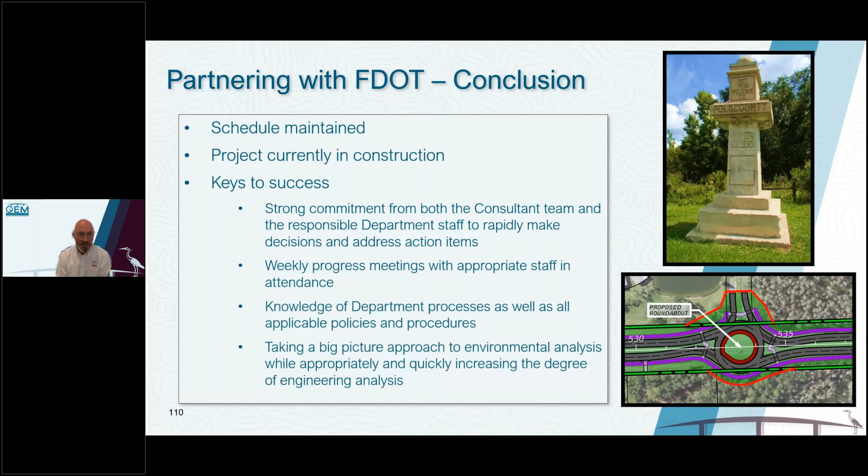So by partnering with FDOT in the ways that I've outlined here, we were able to maintain that aggressive schedule, and our project is currently in construction. To get there, we had to begin with the end in mind. We knew that every project is different, and we got with our FDOT partners and our consultant team to explore what opportunities this particular project had for us, and that required strong commitment from both the consultant team and the responsible department staff so that we could rapidly make decisions and address action items as they came up. As I've hammered in, we had weekly progress meetings with appropriate technical information supplying and key decision-making staff in attendance. We had to be very knowledgeable of the department processes as well as all of the applicable policies and procedures. And when we overlay all of those processes, policies, and procedures, we begin to look for the areas of opportunity where we can explore those efficiencies. We took a big picture approach to environmental analysis while appropriately and quickly increasing the degree of engineering analysis. Next slide. And so here we are in September of 2024, and construction is underway.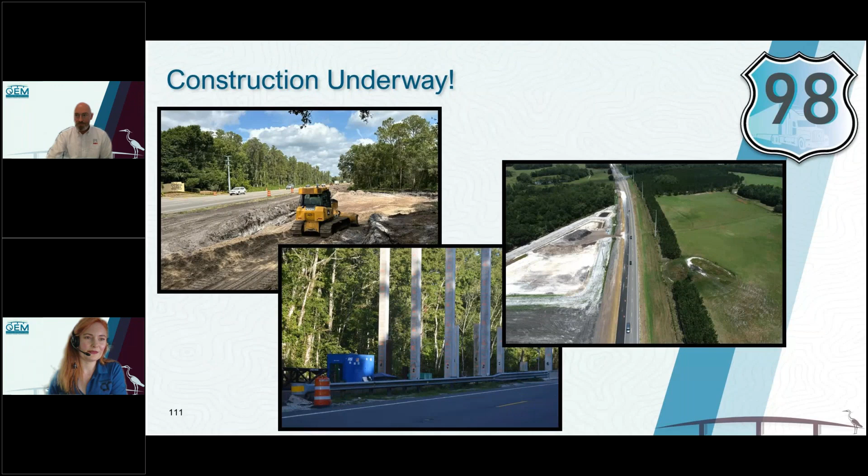Amazing. Thank you so much, JJ. And we do have a question for you from Brian. Thank you, Brian. So JJ will get you that question. But moving right along, yes, let's give him some support here. Isn't everybody doing a great job today? We're getting some fantastic information.

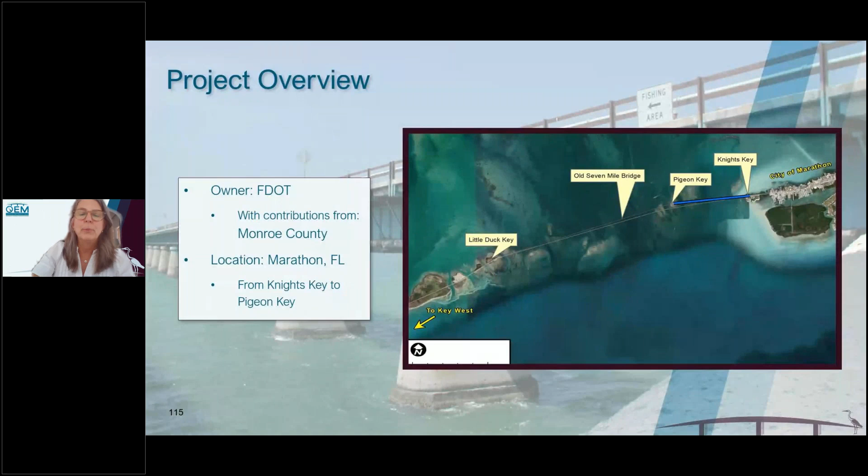Thanks. Next slide. So just a quick overview. Again, this is the location of the old 7 Mile Bridge, and really, it's a 2.2 mile portion of the overall old 7 Mile, the historic bridge between Knights Key and the historic district of Pigeon Key. This blue indicates where the portion of the bridges that we're talking about, just off the city of Marathon. And this was, again, a project through DOT District 6 with contributions from Monroe County. Next slide, please.

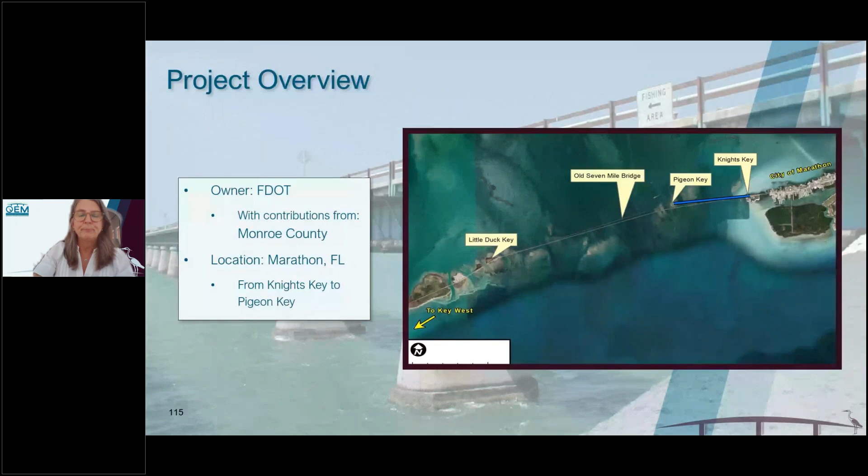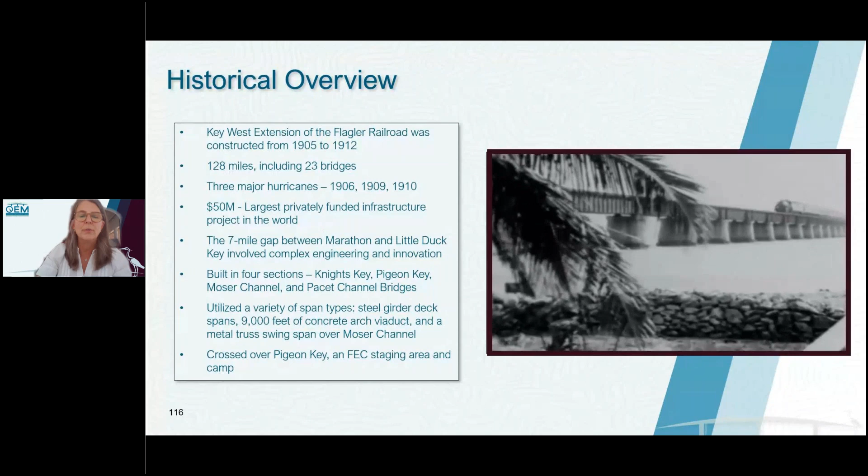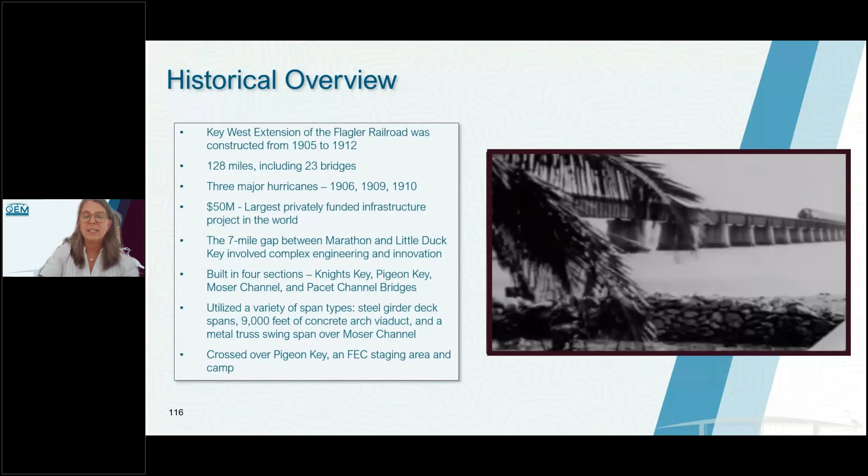And just a quick historical overview, because again, this is just a landmark, the Key West extension of the Flagler Railroad, constructed between 1905 and 1912. It was 128 miles, including 23 bridges, which are still extant. There were 3 major hurricanes during the construction of the Key West extension: 1906, 1909, 1910. And at $50 million, this was the largest privately funded infrastructure project in the world at the time. So what we are dealing with for this was the old 7-mile bridge, which closed the 7-mile gap between Marathon and Little Duck Key. Of course, this was extremely complex in terms of engineering, very innovative, had to be built in 4 portions that utilized different span types: steel girder deck spans, concrete arch viaduct, and also there was a metal truss swing span over Moser Channel. And then the original bridge in its entirety crossed over Pigeon Key, which was an FEC staging area and camp. Next slide, please.

Evolution of the bridge. The Overseas Railroad was severely damaged by a deadly hurricane in 1935 on Labor Day. After all the damage, the FEC Railway abandoned the railway. In 1936, the state of Florida purchased the railway right-of-way, and then there was a movement to start converting the rail bridges to vehicular use.

You can see here in the picture the conversion and expanding the beams to support the widening of the railroad to a roadway bridge. In 1986, the FDOT transferred title of the historic Keys bridges to the Board of Trustees of the Internal Improvement Fund, and FDOT does retain ownership of the 2.2-mile segment we're dealing with, the old 7-mile bridge from Knights Key to Pigeon Key, and FDEP manages the remaining historic bridges through LAP.

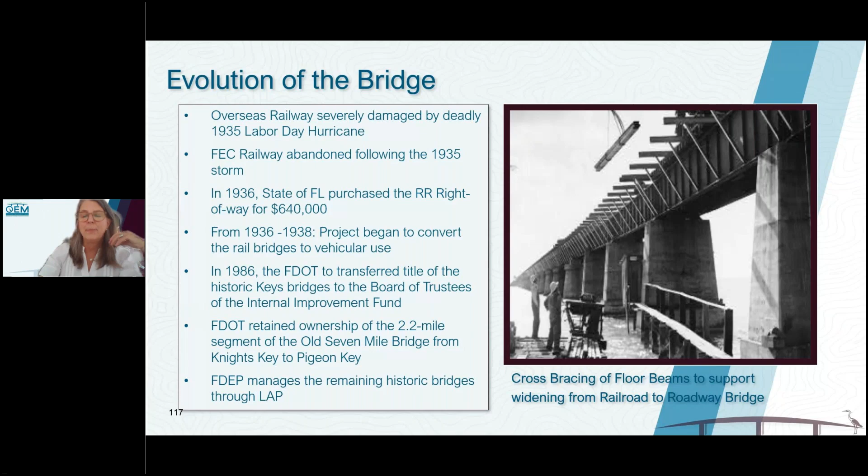You may have seen some of the historic bridges that remain as fishing piers. They're very much used as part of the trailway and for fishing and other recreational activities.

So the path to rehabilitation. This is where it got complicated, because the old 7-mile bridge is National Register listed, as is the Pigeon Key Historic District. So in order to avoid adverse effects, the restoration or rehabilitation needed to meet the Secretary of Interior standards.

And then we had the ramp also that went down from the bridge to Pigeon Key. That was a historic resource as well.

In 2004, there were some initial efforts to develop the project, and there was going to be some partnership with Monroe County, and that became a challenge. So the project stalled for a bit, and then the condition of the bridge was getting to a point where it could no longer have trolley use, which they were using to carry people over or supplies.

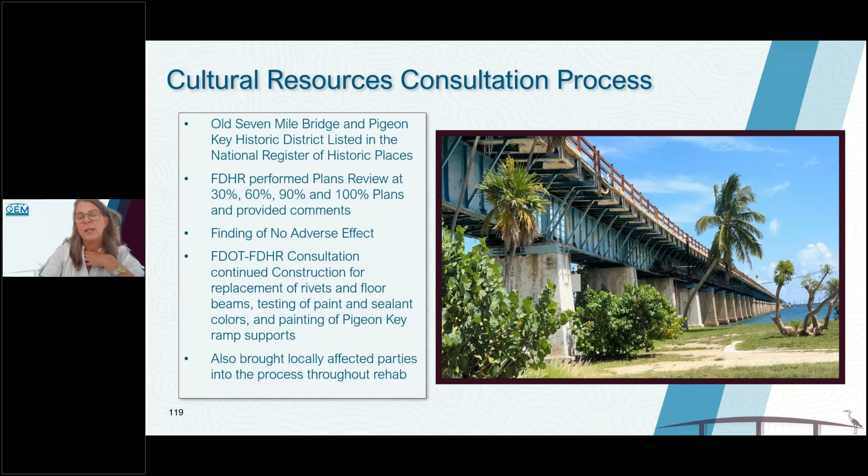So working with the Division of Historical Resources, trying to come up with solutions to some of these challenges - paint colors, painting the Pigeon Key ramp also, all these things we worked through. This was often communications, trying to keep this going and meeting the concerns of DHR and also the locally affected parties that were brought together throughout this, including the Pigeon Key Foundation and Friends of Old 7 Mile.

Okay, so here we go - challenges. Again, meeting the Secretary of Interior standards. This was a highly visible project. The old 7 Mile Bridge is very well loved and was used for sunset strolls. Everybody just loved this project, loved the bridge, and really felt strongly about it.

The unknown condition of the bridge components - the I-beams, the rivets, the railings, new railings - all these were things, as I previously discussed, that we needed to work through during the rehabilitation, how to appropriately address these historic materials and changes while still meeting the Secretary of Interior standards.

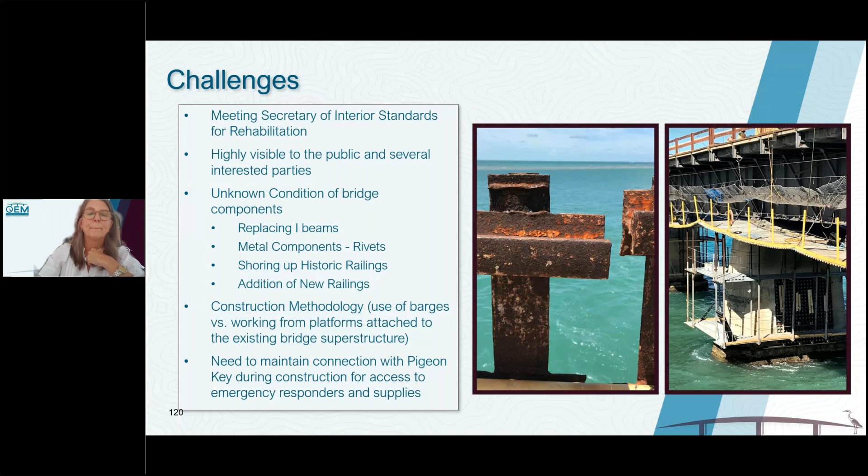Some takeaways—a common question would be about cases where historic bridges need to be removed and replaced. That's another process where, unfortunately, historic bridges do need to be demolished, going through the whole Section 106 process and perhaps documenting the bridges with large format photography and markers. That's sometimes the alternative if a bridge cannot be rehabilitated.

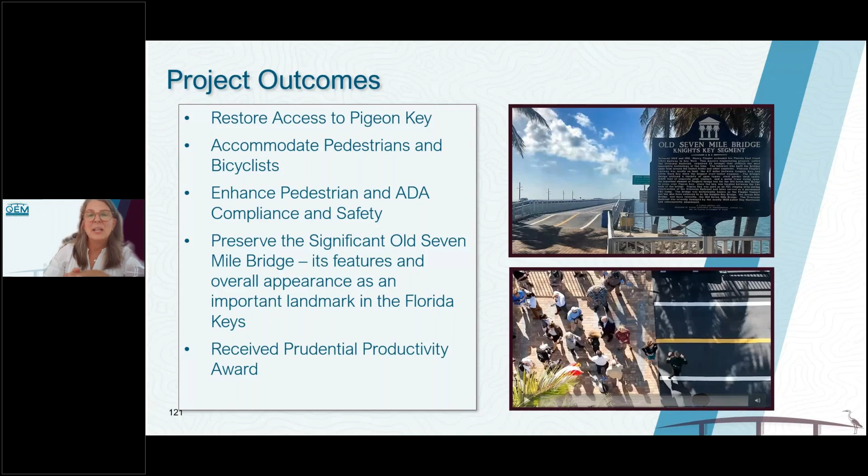No questions from the audience yet, Amy. Another great presentation. Let's give a round of applause for all of our consultant presenters today. Thank you all so much.

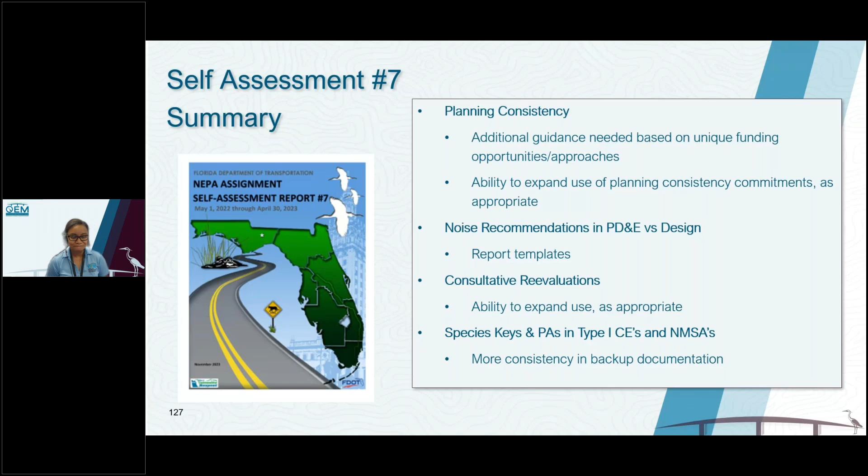We're really looking not just at places where our program can be stronger, but also at ways that if something is working for us, we can expand the use of it, because now we have proven that the risk is low. Overall we have a mid to low risk program, which Federal Highway agrees with. So congratulations to all of you for contributing to that.

Just to give you a highlight, in 2024 we were busy. We had 776 total approvals between state and federal documents, 555 federal approvals, so we were rocking and rolling. A lot of this had to do with some Moving Florida Forward projects that we were able to support the districts in pushing out. But as always, Type 1 CEs, even at the national level, are really the highest area of documents that we're putting out. Great job to all of our districts and their supporting consultants for keeping our program moving forward.

Next slide, please. So we've had quite a few questions about what's going on with 404 permits and environmental permitting. As you're probably aware, in February of this year FDEP's 404 program was vacated by a federal judge, and we've had to pivot pretty much all of our projects to the Army Corps. In doing this, we now regularly meet with the Army Corps as OEM to provide a statewide perspective for the projects that we are requesting 404 reviews from.

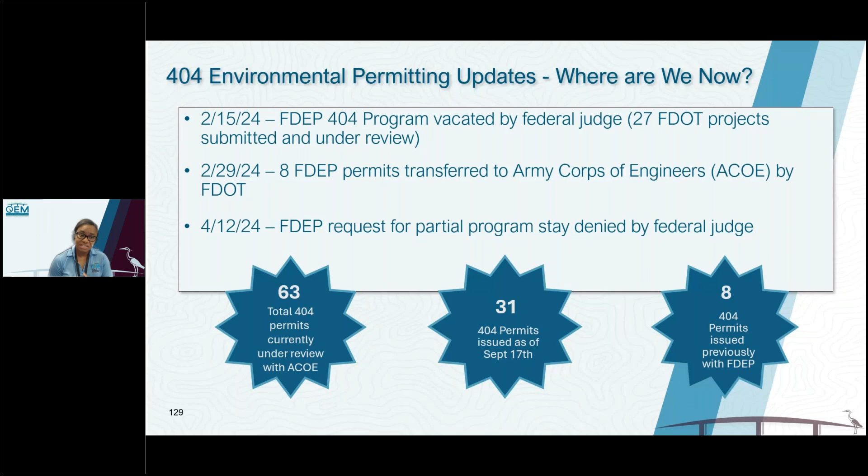Next slide. And I do have to say that our Army Corps partners have been just absolutely wonderful in supporting us and making sure that we can all get through this together. They have had an increased workload and some compressed schedules. Those are challenges that we are continuing to work through.

Our OEM permits team meets with the Army Corps reviewers weekly to go over statewide priorities. That does not stop the districts from having pre-app meetings and individual project discussions with the Corps, but it helps us monitor and have enhanced communication, to see what the workload is, to try to head off concerns before they grow into something bigger, and communicate with all the appropriate groups, whether it be a district director because a letting is affected, work program, you name it.

We also want to make sure that we're monitoring the workload to see if we need to add an additional reviewer. We want to go ahead and get that process going as soon as possible because it does take time. So we are making a lot of progress in this area, and we'll just keep moving to the best of our ability. Next slide.

So the next couple of slides are going to talk about outreach, and essentially we've done quite a bit more outreach than we've ever done with the industry. This is our third industry forum. We'll have our fourth in the spring. We're looking at what potential topics that could include, so if there's any thoughts that you have, please let us know.

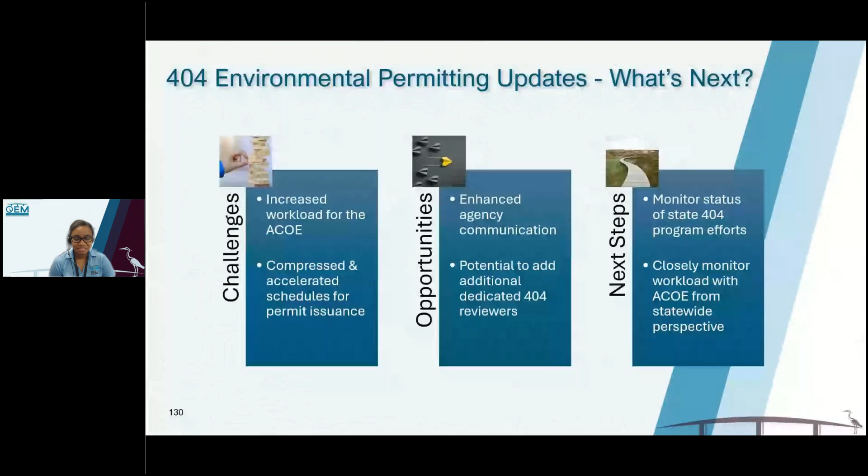So I do know actually what the next slide is. It is about our statewide coordination, and we have done a lot of it. It's been very important for us here at OEM to get out into the community and talk about what we do supporting the environment through transportation projects when we don't have projects. Because when people have feelings involved or some kind of attachment to a project, that's going to skew what our conversations are going to be. When we can give them a broader perspective of how much we actually do at FDOT when we're really telling our story, that helps.

So this past fiscal year, we went to over 20 workshops and conferences, not to mention events like the archaeology open house we held here in central office to introduce folks to what we do in cultural resources, and the videos we put out, like Connecting with Broketail, and the Florida in Motion podcast that we had with the secretary. It just helps get our messaging out there about what we do as environmental project management professionals.

So, in addition to the other things that I mentioned that we're doing, we are also doing this outreach to help promote what we do in this industry a little bit more.